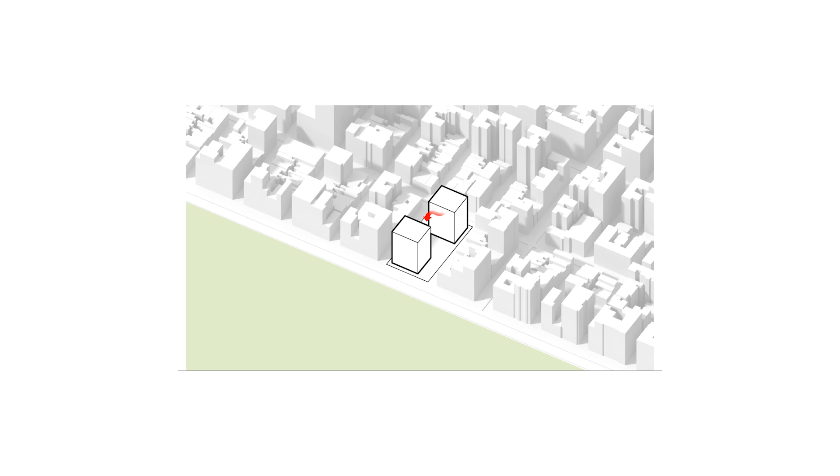In today's video, I'll walk you through creating BIG Diagram. Diagram has become an integral part of architectural practice because they're so good at explaining all the concepts for your buildings. And now, well-known company BIG has made a name for itself for using this style.

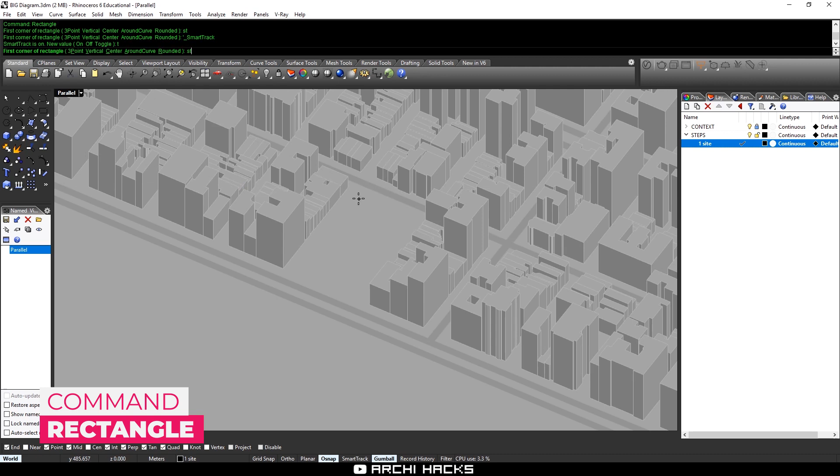For our actual proposal, I'm going to create a new group called steps. For each layer, I'm going to be modeling each step of the design process. So for number one, it's just going to be site. I'm going to go ahead and lock our context so that we don't change anything. Once that's complete, I'll use the rectangle tool to outline our site, creating something like this, then scale it down in this axis to make sure our site is properly sized.

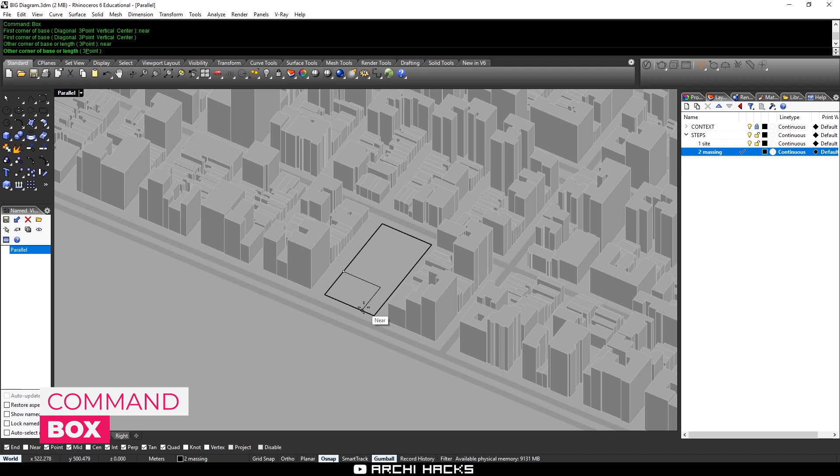Once that is complete, I'll create a new layer for our second step, where we're going to be creating generic massing. I'll create something similar to our neighboring building, make it the same height as that one, and use Scale 1D to offset our building slightly from the edge of our context so it looks a bit more realistic. Then we'll do the same thing for another tower at the back over there. Seems pretty good, so let's say this is what the zoning allows us to do.

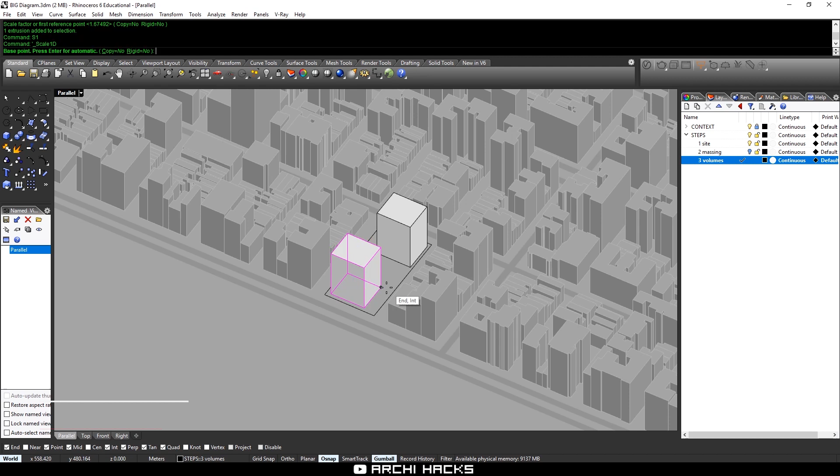We want to make it a little bit better than this one, so we're going to create a third step. We'll right click on the layer and choose duplicate layer and objects. The third step is where we're going to be rearranging the volumes, so I'll name it volumes, and make sure to turn off the second layer so there's no overlapping selection. Once that's done, we're going to make the first tower a little bit shorter, and for the tower at the back, make it a little bit more narrow, but instead, let's make it a little bit taller. So that was our move for the third step.

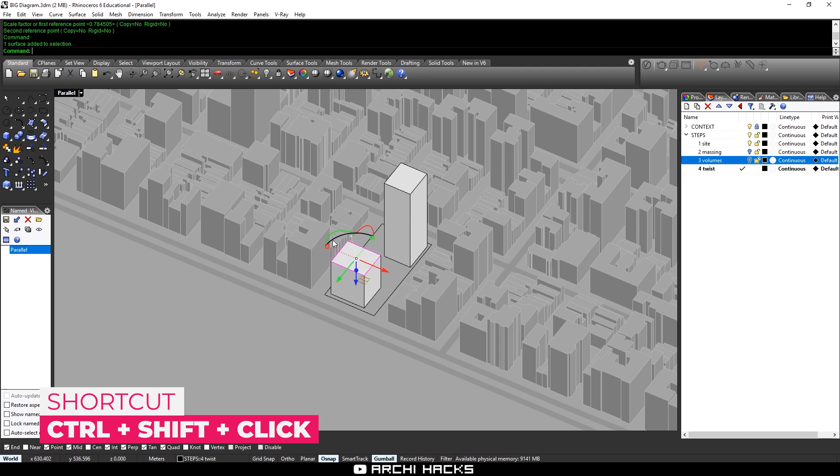Last but not least, to give it an iconic look, we're going to add a twist. Let's duplicate the layer and objects again and name it twist. I'm going to turn off the third layer, hold down Control-Shift and click on one of the faces of the building, then use the blue gumball to rotate the faces. By the way, this project is inspired by the Coconut Grove project by BIG. I was heavily inspired by this project when I was just starting out, and I just wanted to recreate that here.

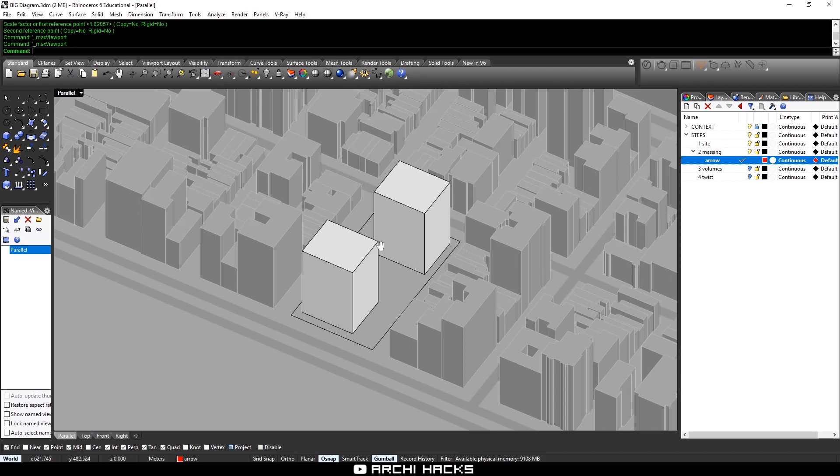Now we need to create some arrows to help explain all the gestures that we're making. For the first one, I'm going to create a sublayer and name it arrow, and we'll make this layer red. What we're going to show in this diagram is the issue with the building arrangement right now, where the first building is blocking the building at the back. So let's create an arrow to describe that.

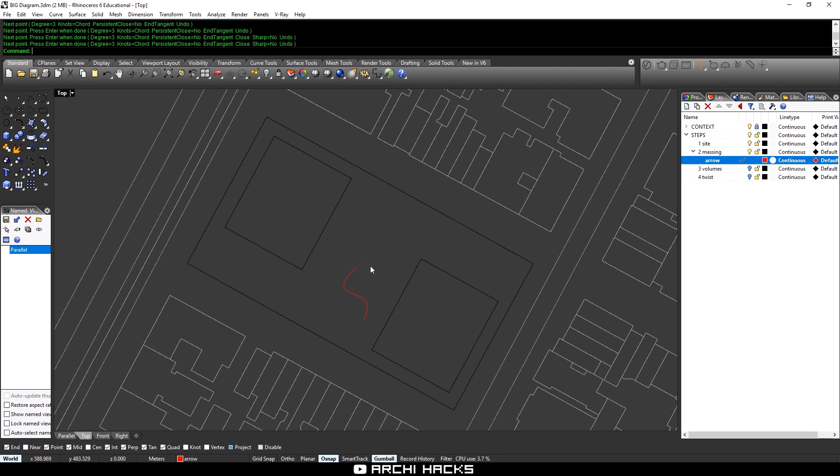We'll go into our plan view and start drawing. I like to use the interpolated curve because this allows you to draw out the exact shape that you want to make. With that selected, I'm going to start drawing a winding curve that shows blocked view. Once that's done, I'll type in offset to create an offset from our curve, using the both sides option turned on, and reduce our distance to say 2.5. Of course, you have to make sure to choose the settings that work for you. Now make sure the cap is flat instead of none. Once that's done and I delete the original one, we're left with this winding curve.

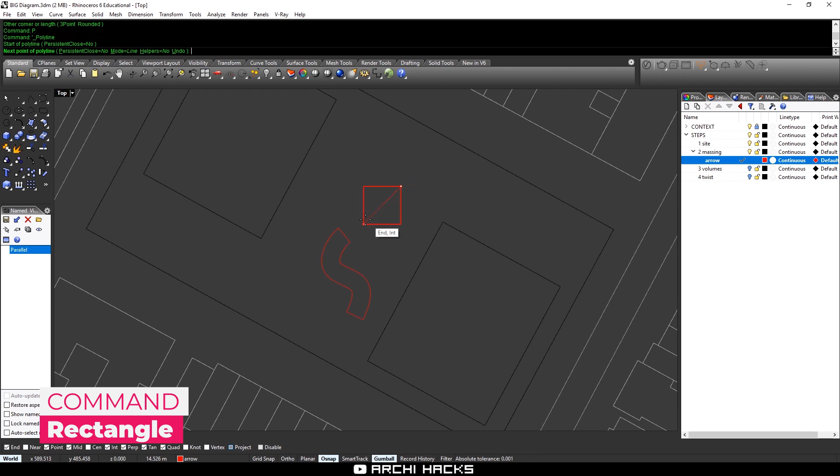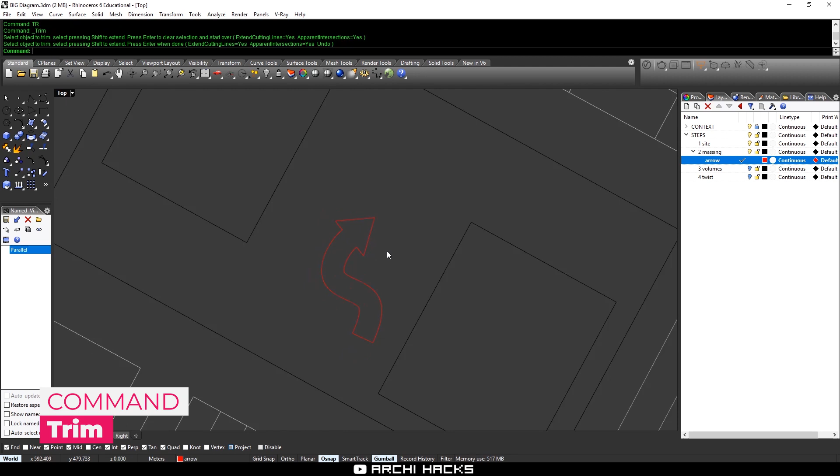I'm going to create an arrowhead by using a rectangle to create a square, and with a polyline, I'll cut this in half and trim it. Then we can use the move tool to rotate it around and start shaping our arrow so it looks pretty good, using various commands such as scale and trim to transform our arrow. Once everything is complete, I'm going to join all the curves into one single curve and go back to our view to arrange it. I'll put it in this arrangement and bring it up a little bit.

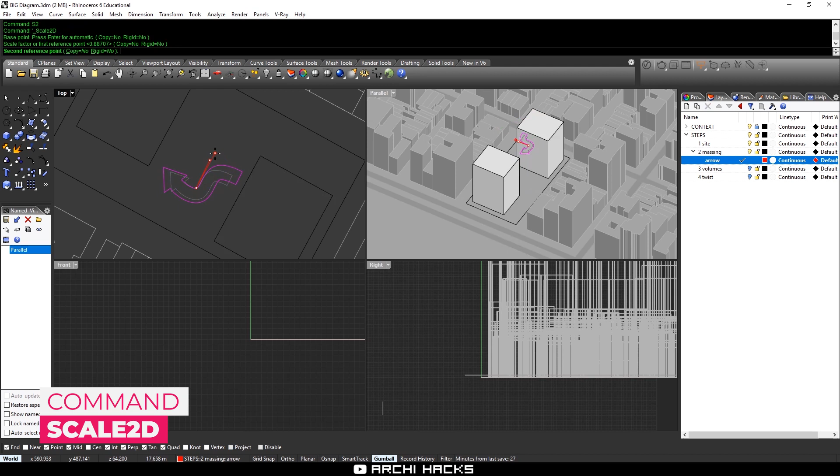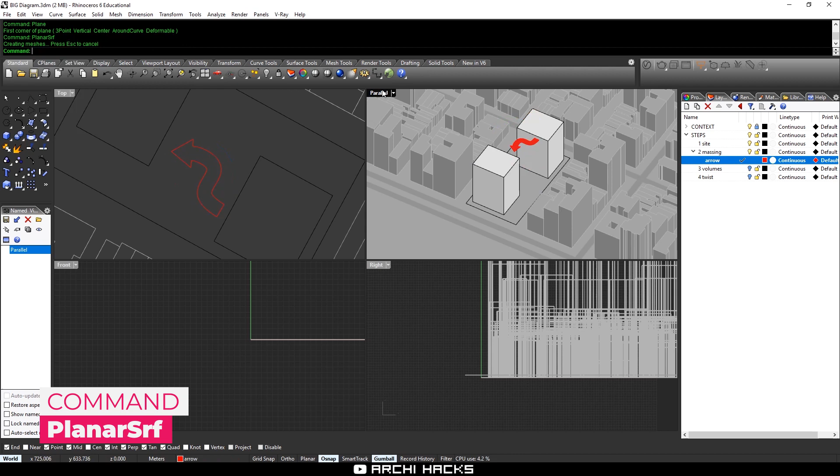I'll make this a little bit bigger. Okay, that looks pretty good. I'll flip this over so the arrow points directly at the building in front of us. To preview what we're going to get, we can use a planar surface to fill in our arrow, but for our purpose we're actually going to leave it blank. I'll show you why in a bit. Once that's done, we can move on to the third step.

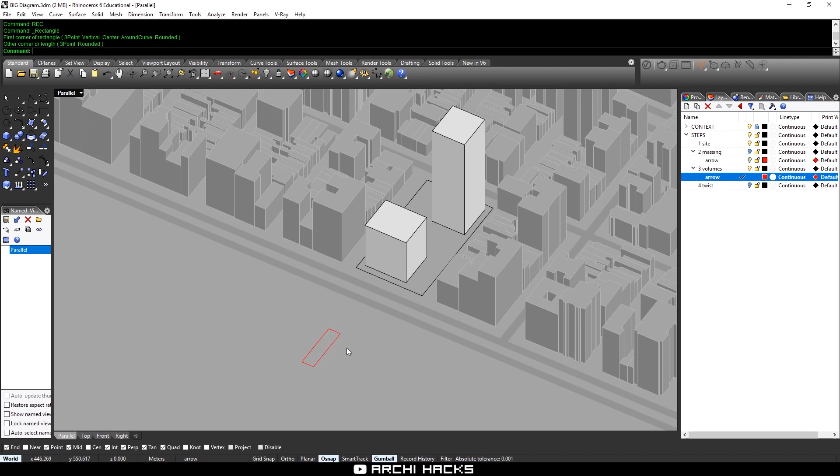Likewise, we're going to create a sublayer called arrow and make it red. For this one, I'm going to create a straight arrow, using the same technique: use a rectangle to create the body of the arrow, and use a combination of polyline and square to create the arrowhead.

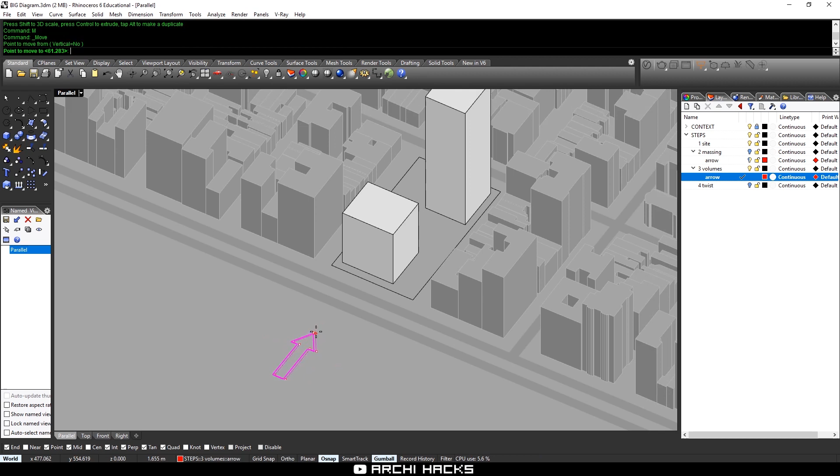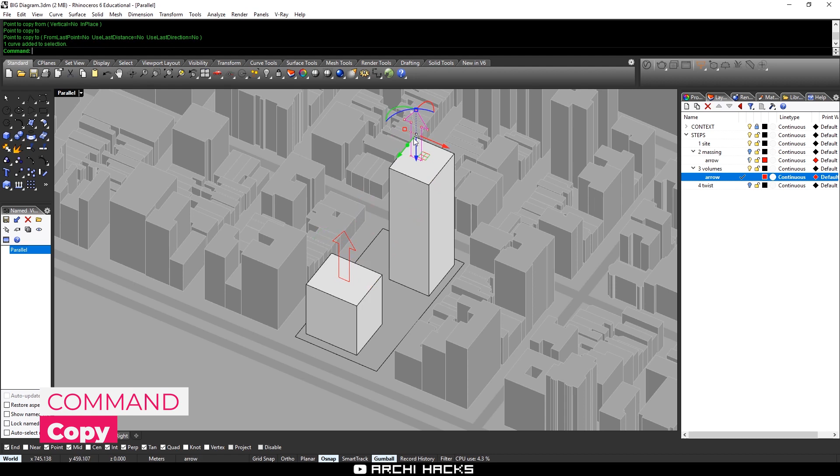Okay, then I'll trim the intersection to clear that out and join it. Let's scale this one down a little bit and move it to the appropriate place. I'll move it to here, and then rotate it in this axis to orient the arrow in a certain way. Then I'll place it in the right place. Copy that over. All right, that looks pretty good.

Now what I'm going to do is rotate this one because it's actually in the wrong orientation. We've made this building a little shorter, right? What I'd like to do is express our gestures using the arrows. So for a compressive move, I like to make the arrow slightly wide, and for gestures where we're pulling stuff, I like to make the arrows a little bit narrow and long. Okay, that looks pretty good.

We've also made the buildings narrow in this dimension, so we'll also create arrows for that.

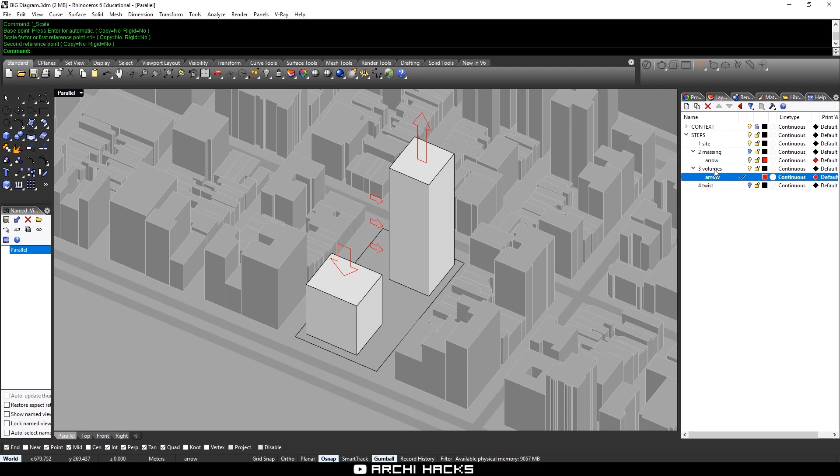One more thing I want to do in this step is add view arrows. For the view arrows, I'm going to create a new sublayer and give it a different color so we can distinguish them a little bit, and choose copy objects to layer. What this does is create the same instance in a different layer while keeping the old ones intact. So I'm just going to go ahead and place this in the right place.

Place our arrow in the second building where we just provided a new view as a result of extending the building in the back and compressing the building in the front.

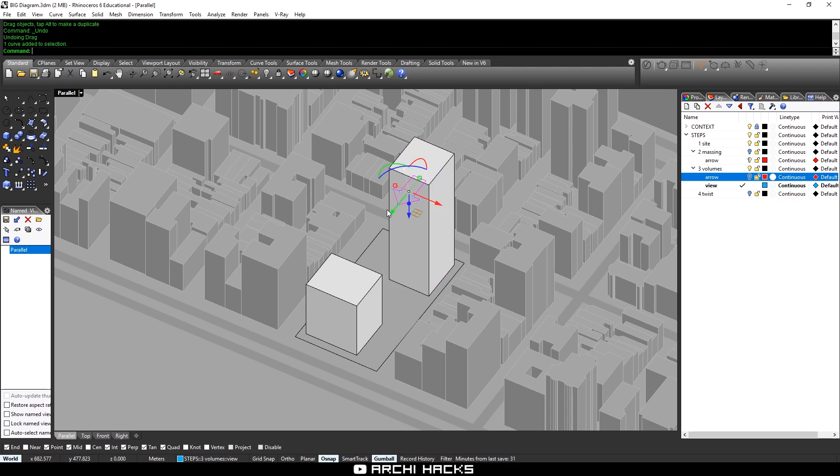Okay, I'm just going to make sure this arrow isn't intersecting with the building. Let's see everything together. I think it's possible this arrow is a little too close, so I'm going to redistribute them a little bit. Move it down. Okay, I'll keep it like that for now.

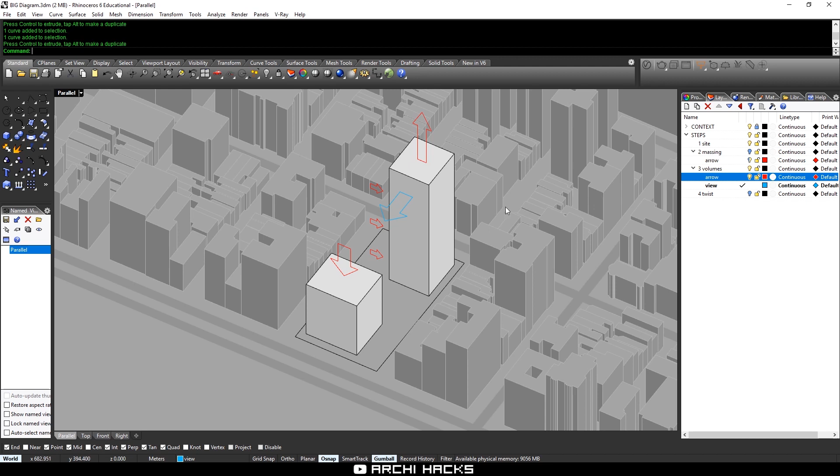Let's move on to our final gesture, where we're giving this iconic twist. I'll create another arrow layer, and this time I'm actually going to duplicate this layer, duplicate layer and objects, and drag and drop it into this fourth step to make a copy in this layer group. Once we turn it on, as you can see, we have the same arrow we made earlier.

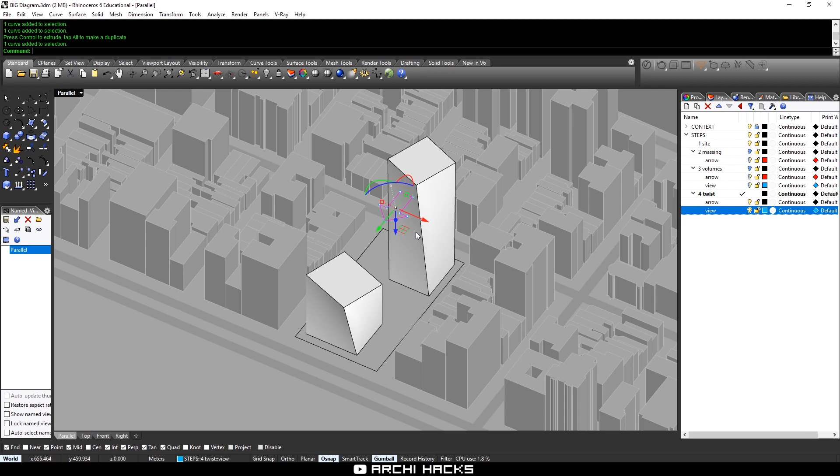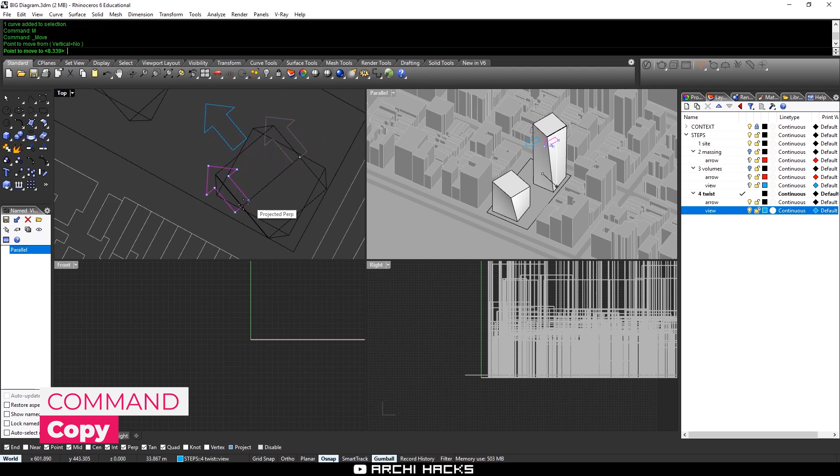Now let's go ahead and edit this so we're showing how the views have rotated. I'm using a combination of the move command as well as rotate to place the arrow in the correct locations. For the second arrow, I kind of want it to be on this side, and then put it slightly off from the building.

I'll take these two and simply copy this over into our lower building. For this one, we'll have to bring this down, just like that. Okay, looks good. All right, I'm going to move on to our twist arrow.

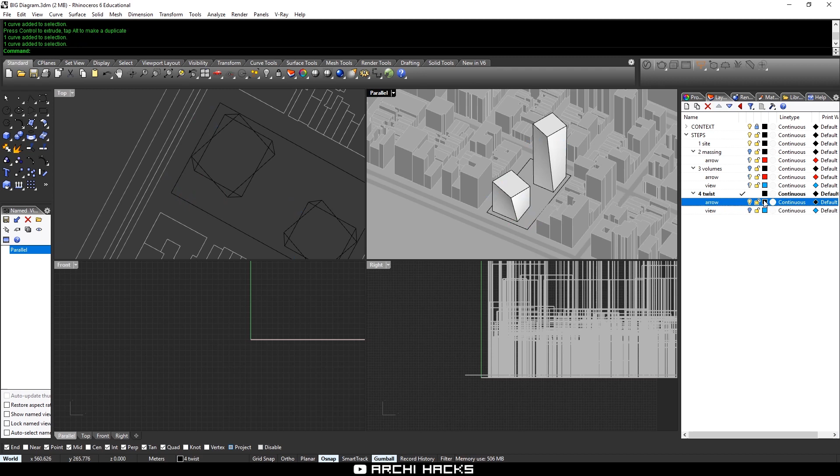I'll make this layer red as usual, and go to plan and draw some rotating arrow. For this I'm going to use the command called circle, and I'll use offset again, offsetting twice to maintain the same arrow thickness. And quickly create an arrowhead for this as well.

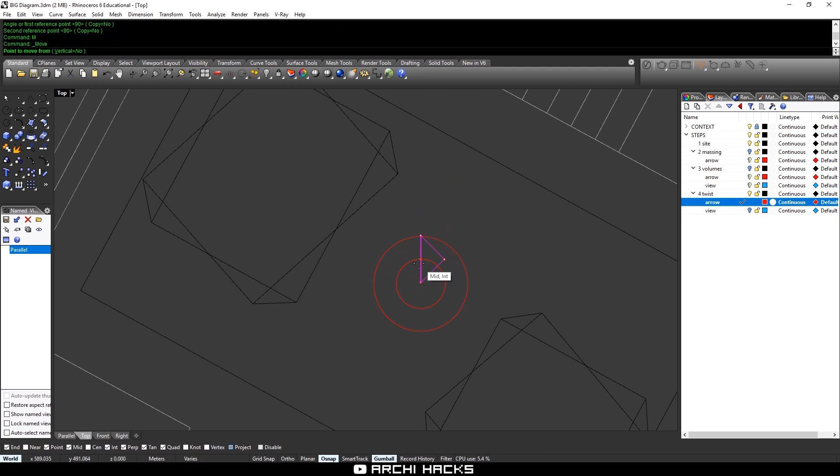One neat trick I like to use: when you're moving to a point that is exactly in between two points, you can use the command called between. Once you do that, you can choose two points, and Rhino will place your initial point in the middle of the two.

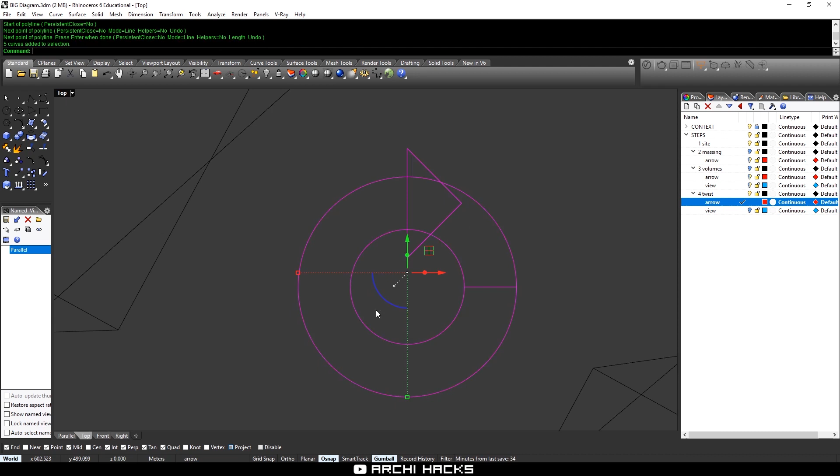Okay, once that's done, I'm going to use trim to get rid of unnecessary curves, and then we'll be left with this rotating curve. That looks pretty good. I'm going to go ahead and place this on top of the building.

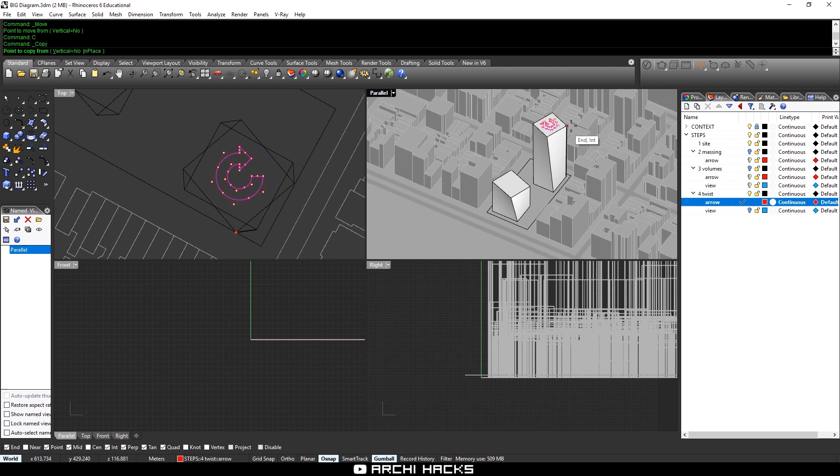Okay, looks good. Now just move it forward just a little bit. Actually, I'll leave it right there. And then I'll make a copy and place it right on the second building. I'll try to center that a little bit. Oh, okay, it's way high up in the air, so I'm gonna fix that.

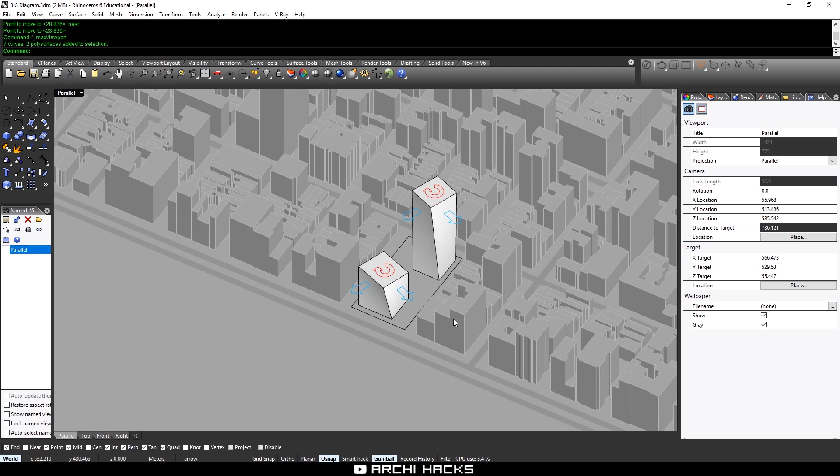Now with everything turned on, this is how it looks, and we are ready to make this into a 2D line work. So in order to do so, I'm gonna go into properties and make sure our projection is parallel. You could actually use perspective if you wanted, but for this instance, we'll use parallel. And I have a view saved already, so I'll just use that.

Once everything is set up in place, I'm going to capture them one at a time using the make2d command. So when you're making 2D, I'll use the current view that we're looking at. Projection will be by view, and we'll maintain source layers.

You can keep these off, and we'll make sure to turn on scene silhouette because this gives us the nice outline. And then viewport rectangle, that will be useful in creating our artboards later. We can group output if we wanted, but this won't be too necessary. Actually, we'll call this 'all caps diagram' because we have a convention going on.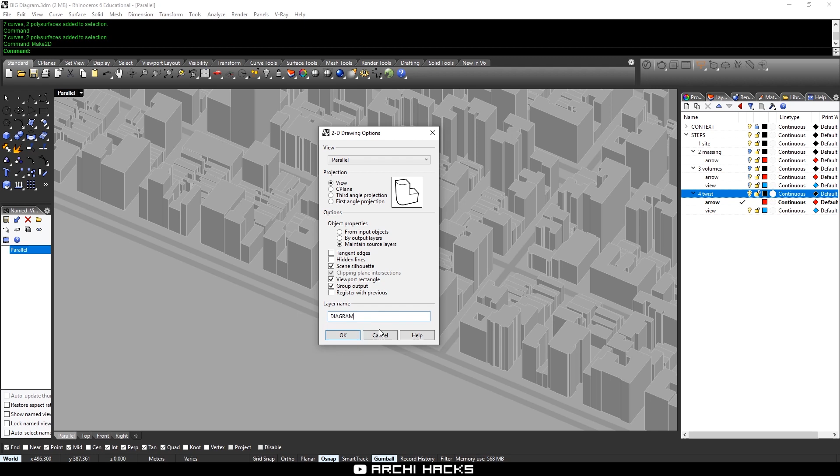Once you say OK, you'll see that in plan view, you have a line version of the diagram that we just made. We'll repeat this process for the other steps as well. Turn off the fourth step and use make2d.

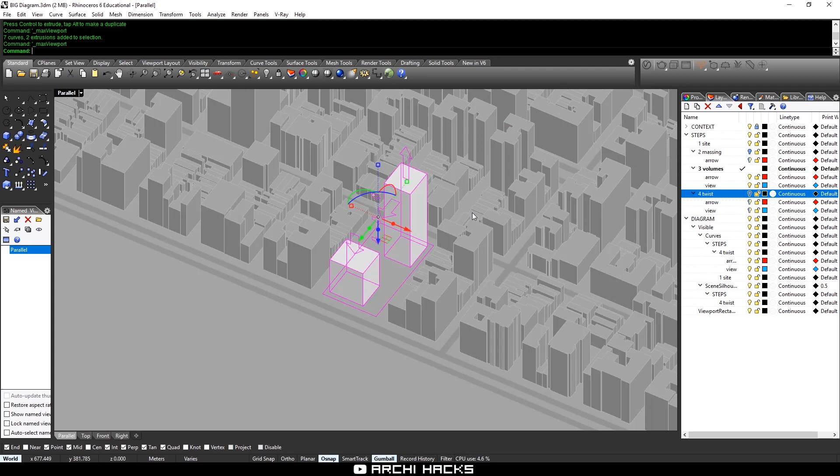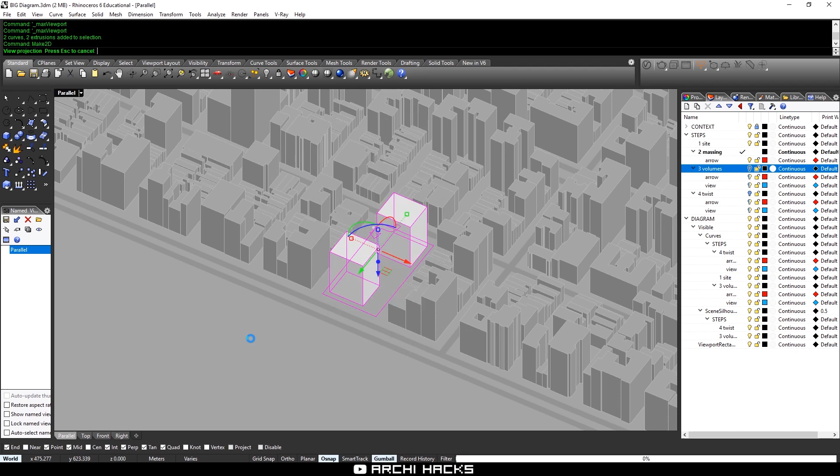Once that comes out, we'll place it right next to each other so that we can export them and organize them slightly easily. We'll go to our second step, make2d. Last but not least, step 1. Done.

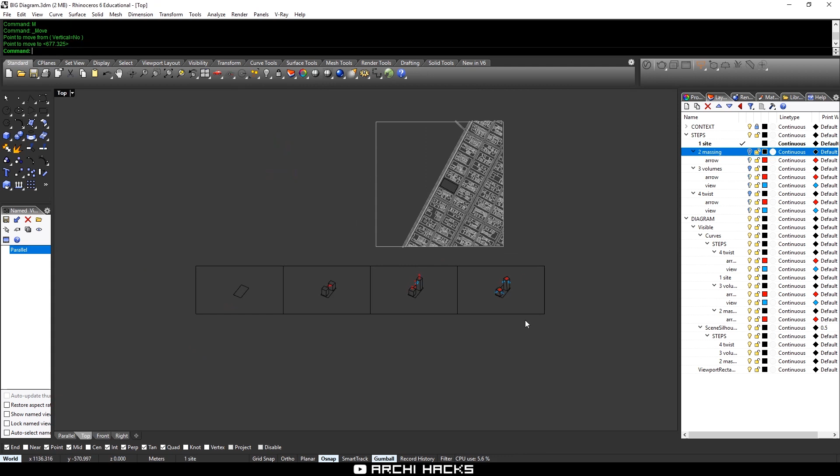All right, once that is complete, we can export these into Illustrator. We'll type in the command export and choose Illustrator as our export file format, and we'll save it as diagram outline. When the option pops up, we'll just use snapshot of the current view and say OK.

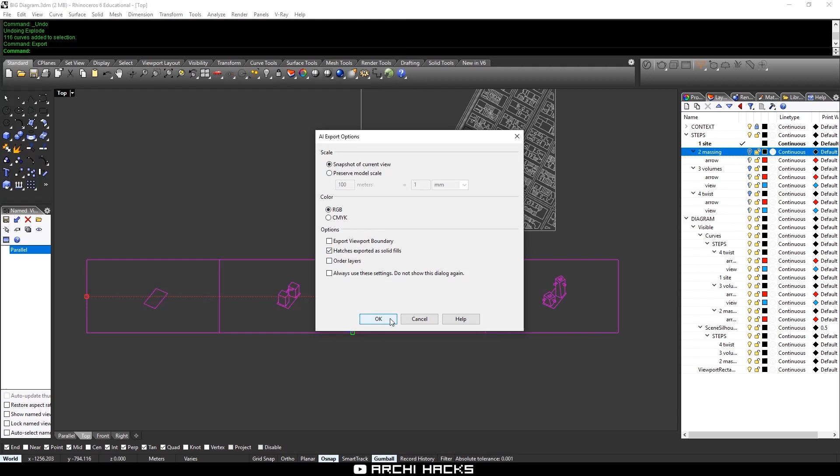Before we switch over to Illustrator, we have to export our base model. So for that, we'll come back to our original perspective, go over to V-Ray settings and make these changes. We'll turn off progressive and use V-Ray denoiser, and turn on material override to make everything a single color.

Then we'll switch over to lighting, where we're going to turn on Rhino Document Sun and reduce the brightness to 0.1, and adjust the size. If you increase this value, it actually makes your shadow a lot more soft. For color mode, we'll use override so that everything stays black and white. Lastly, I'll make sure our render output is high resolution. And then let's try how that looks.

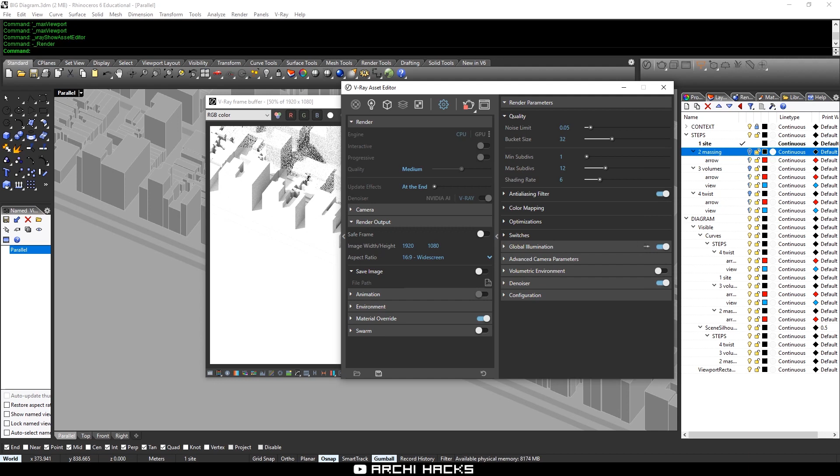Okay, once the rendering is complete, I'll actually go over and use color correction. If you click on this little icon in the bottom left corner, it'll bring up this pane, and here you can make some quick adjustments to your images so that you don't have to go all the way to Photoshop. For our purpose, I'll reduce the exposure just a little bit. Actually, I'll make the highlight burn 0.5 and increase the exposure just so that the brightest part is pure white.

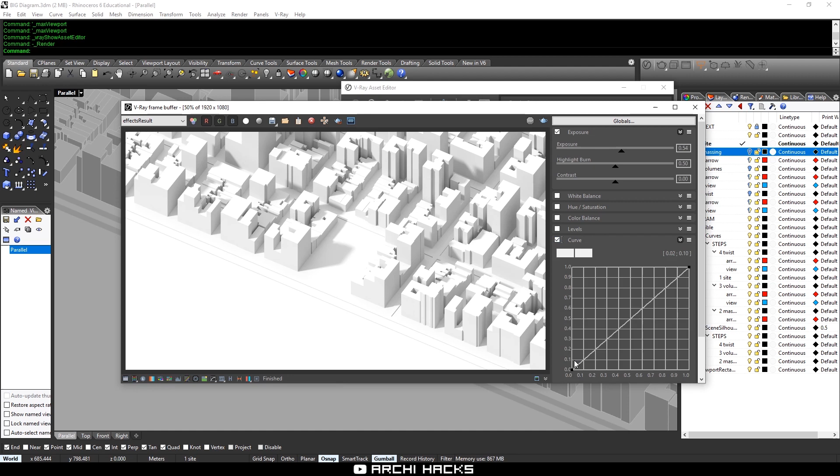I'm going to go ahead and use curves adjustments. Make sure to turn the check mark on so that the editing is enabled. And I'll take the bottom left corner pin here and then bring it up. So this curves move will leave the bright parts the way they are, but take the dark sides and bring them just a little bit more bright.

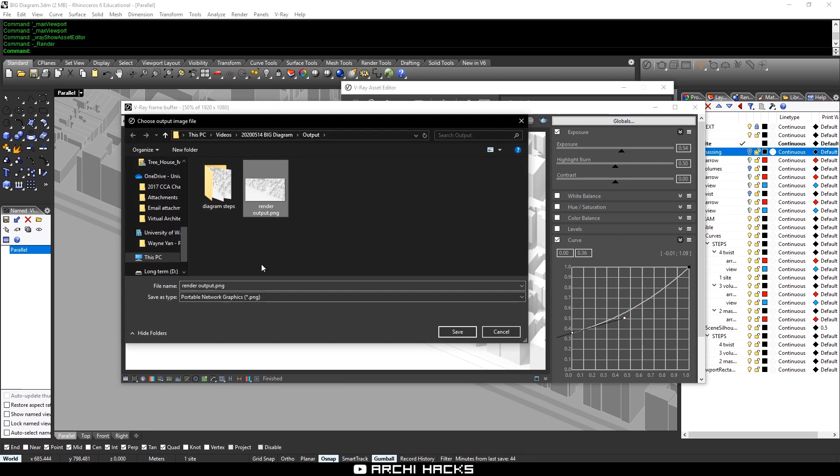Once that looks good, we are ready to save this. I'll name this render output and save it. And now we are ready to head over to Illustrator.

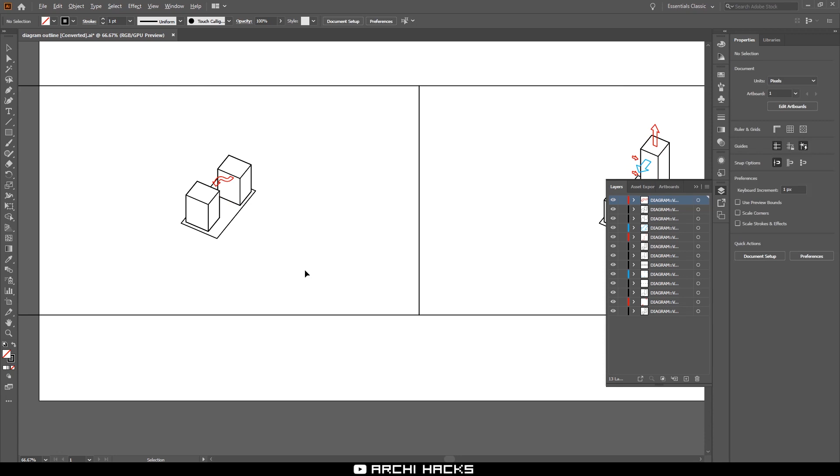Okay, I've just opened up our Illustrator file that we have just exported, and here's our result. As you can see, our diagram's a little small, so I will make this a little bigger. I'll right-click, transform, scale it, and we'll scale this up so that a 1-point line is a good amount of thickness. Right now it still looks a little bit too thick, so I'm gonna make it 600% and say okay. All right, that looks pretty good.

And we'll take all these frames and remove and invert the black and white. Now we can use these frames to create new artboards. If you simply click on these black boxes, Illustrator will create new artboards for you that fit just right. And we can delete the original artboard that we started with.

Once that is complete, we can actually completely get rid of this whole layer. There we go. Now we have evenly sized artboards that are right next to each other, and our diagram stays exactly in the same place.

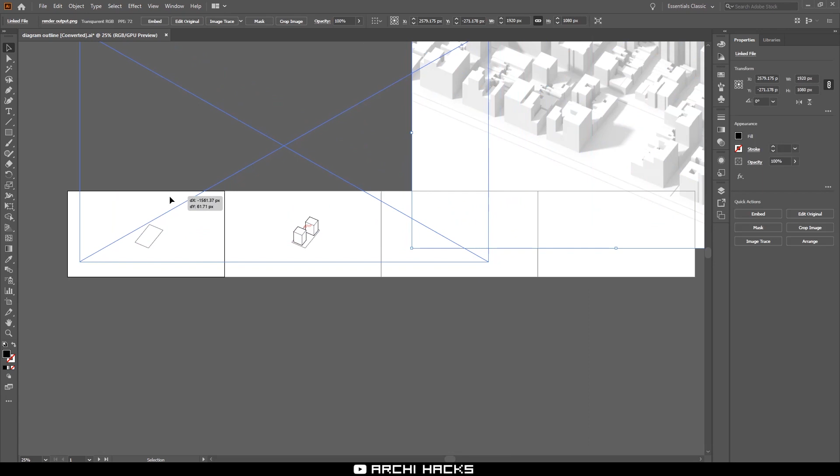Now, first thing I want to do is import our image. So I'll navigate to our folder and drag and drop our image onto our canvas. I'll place this on a new layer called background, and by dragging this little box over to the other layer, we can move the image between layers. I'll place this right at the bottom and start scaling it so that it fits perfectly with our diagram.

By default, if you make the image fit perfectly into the frame and center it, it should align with the line work. To test it, we'll try pasting that into other panels. A quick tip for doing that is cutting this original object out and using Ctrl-Alt-Shift-V, we can place the same image in every panel. All right, seems like it's aligning pretty well.

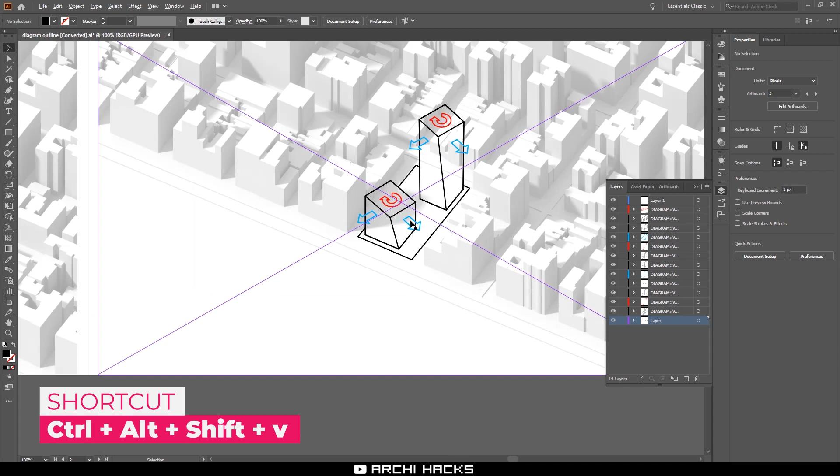I'll lock that layer and go over and start merging some of our layers. There's a lot of commonality between all the common line weights between all the layers, so I can start editing them just a little bit.

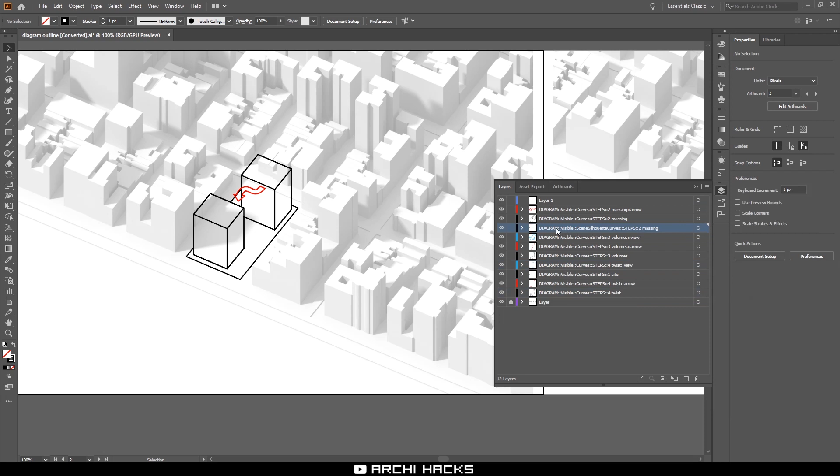If you look closely in the layer names, these actually follow the conventions we've set out in Rhino. For these ones, I'm going to take all the layers that say Scene Silhouette, right click, go into the drop down option, and merge selected. This will conveniently take all the objects in all the layers you selected and put them into one. I'll rename this as Silhouette.

For these guys, I'll place it right at the bottom. Likewise, I'm going to find all the layers that end with arrow, merge it, and name it arrow. For the views, I'll merge them as well and name it view. And all the regular layers, we can simply merge them all together and call it curves.

Our layer 1 doesn't actually have anything, so I'll delete it. Now all our layers are nicely organized into just 5.

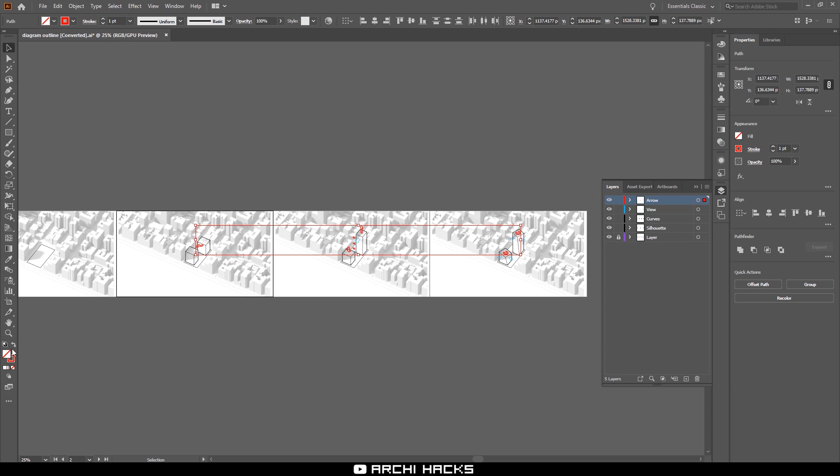What's really convenient about this is that you can apply changes throughout all the diagrams. For the arrow layer, I'll just click on the blank space on the right and invert the foreground and background color to give all the arrows the color we wanted. Same goes for view, we'll simply invert that. For curves, we can actually just leave it the way it is. And for silhouettes, we will use the default color where we have white fill and black outline.

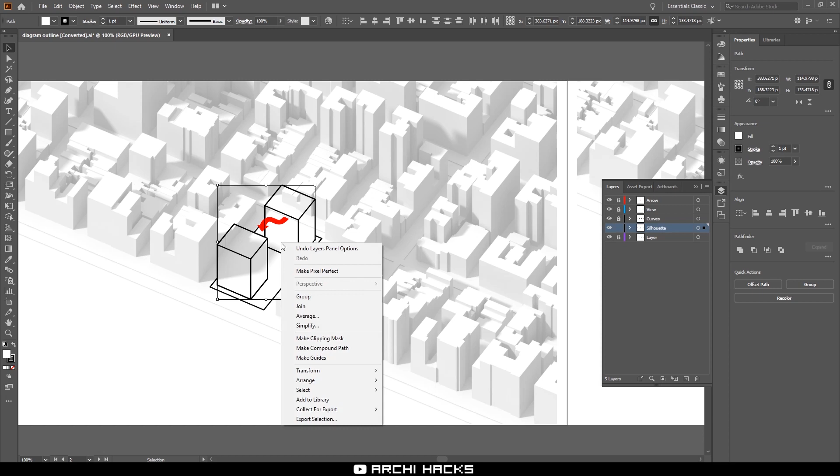One thing I noticed is that the silhouette layer is not joined together, so we'll have to join them manually. I'm going to lock all the other layers and step by step, select all the outlines in one diagram, right click and join, and repeat this process. When there are separate massings, make sure to select them individually so there's no funny lines going across from each other.

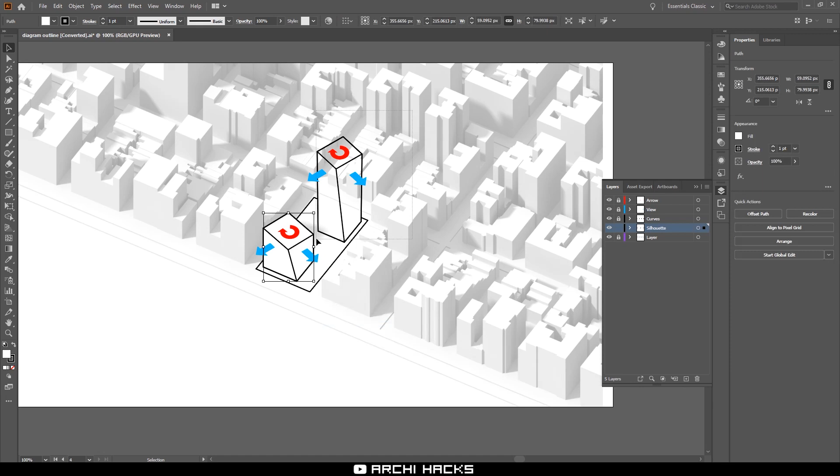Looks good. Repeat that process. All right, there we go.

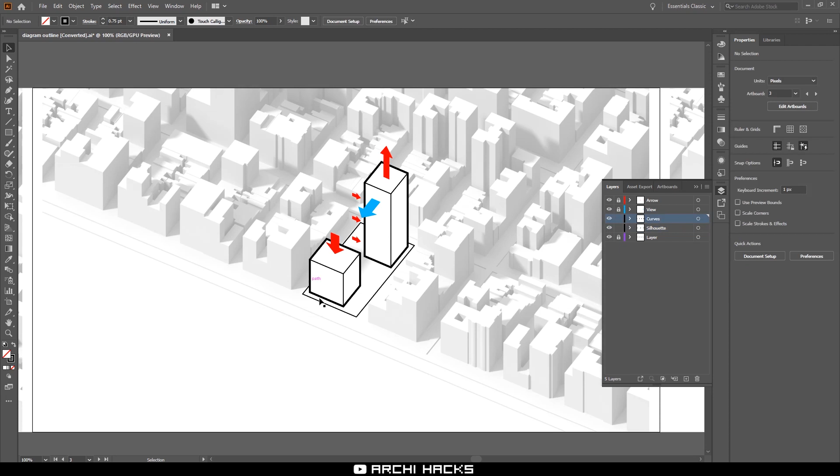Now we'll take all the silhouette objects and give it a slightly thicker line weight. All right, that looks a little too thick, so I'll reduce that to 2. And we'll take our normal curves layer and reduce that to, let's say, 0.75. All right, yeah, I like that, it's pretty good.

Just for the first diagram, because it looks a little too boring, I'm going to give it special treatment. Let's break this out and add a red outline, increase the curve stroke size a little bit, and add some dashed line to it.

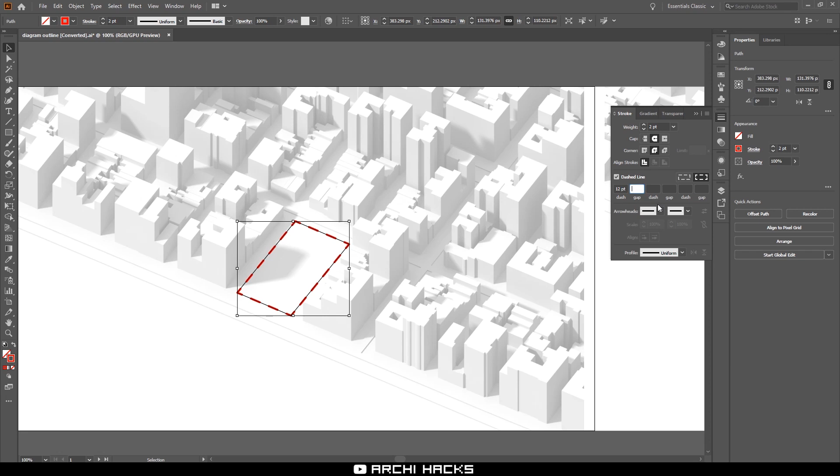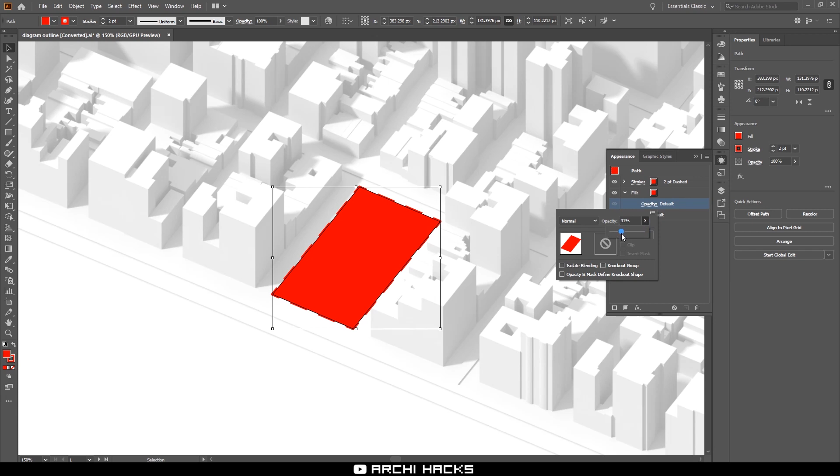Another cool trick is that if you want to give it a different fill opacity, for example I want the outline to be 100% opacity but not the fill color, we can open up the Appearance tab, available in Window, Appearance, and drop down into Fill and change the opacity to your desired amount. I think I'm going to go with 30%. And there we go, now we have all 4 steps ready to go.

One last thing I might want to do is add green for the park that's in front of our site. I'll go ahead and create a new layer and call it park, and using a pen tool, draw in a triangular area.

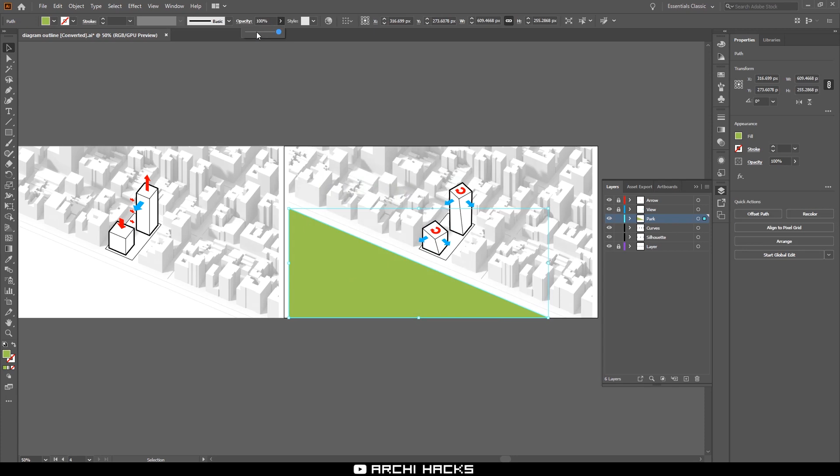I'll make our foreground color a nice green and lower the opacity to about 50%. Using the same paste technique, we'll paste it into all of our drawings.

I think the grass is looking a little bit too dark, so I'm actually going to lower the opacity to about 30%. Yeah, I think that looks pretty good.

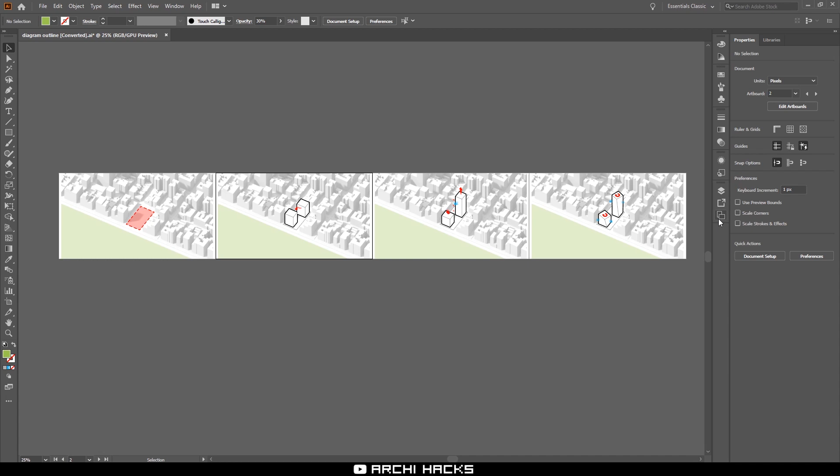I'll lock that back. One last handy tip is that you can rename all your artboards so your file gets renamed automatically. We can say this is step 1, step 2. If you simply double click on the name, it'll allow you to rename each artboard.

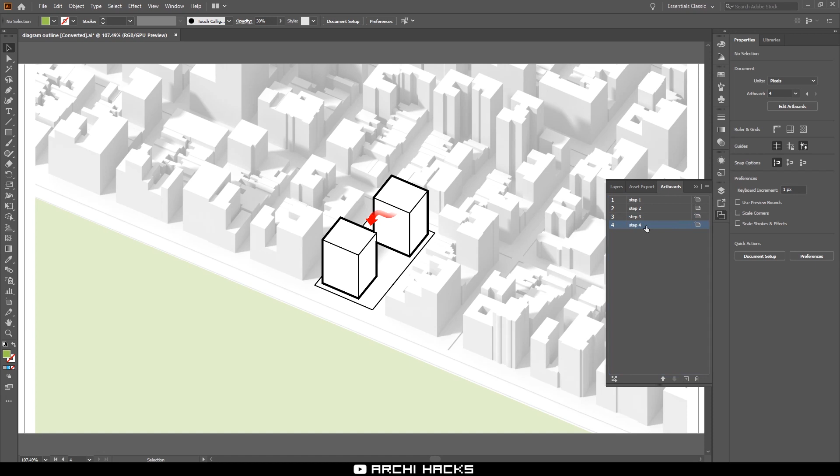All right, let's start exporting into JPEG images. You can go into File, Export, Export for Screen, then go into the Artboard tab, choose All, and find the directory you want to save to. I'll use the settings above and start exporting.

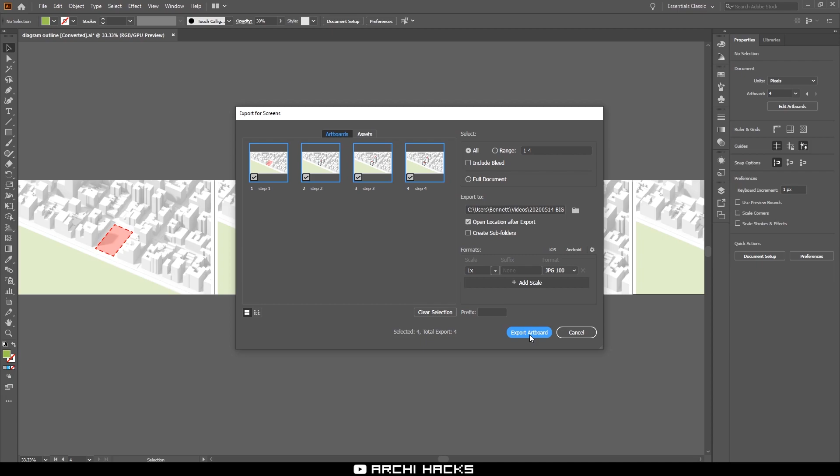I'll go over to another software such as InDesign to finalize our design. So in here, I've taken some images from BIG's website and made a quick panel out of it. As you can see, it fits in perfectly with the proposal.